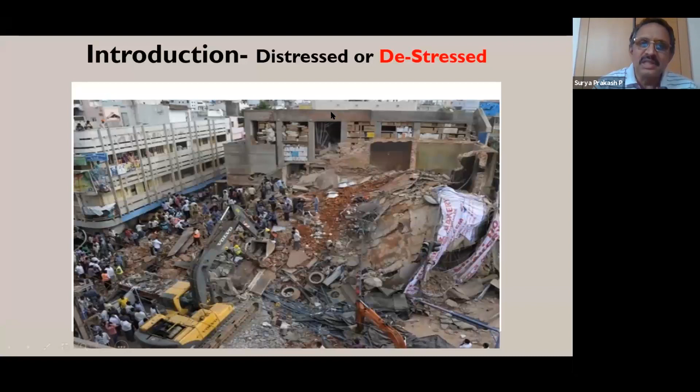But in spite of all this, there are a lot of gaps, like slip between cup and lip. The same thing happens in the design process and construction process also. So the primary cause for distress in any building is a mismatch between the design and construction intent and the actual condition. We think something while designing, but the actual condition will be different. So that mismatch is basically what causes distress in buildings.

So what are all the parameters where there can be this mismatch? Loading, first and foremost. We design for a residential building, people will use it for storage. Like that, there are so many mismatches. And soil conditions: this is the biggest mismatch that can happen if there is no proper investigation or no proper methodology for the soil, which I'll be sharing as we move forward in the lecture.

Accidents. This is another biggest cause. Accident means unforeseen condition, like fire, like blast, like floods. They're all accidents that can happen, which we don't foresee or which we don't factor in our design, except for certain criteria of providing cover and that kind of stuff.

And the materials, again, mismatch in the materials. So the grade of concrete that we assume and the grade that is actually achieved in the construction. Construction methodologies and the structural system. That is the system that we have considered in the analysis and the system that evolved in the construction. Corrosion, which is the biggest thing actually, which can eat into the area of reinforcement that we design and the performance of the structure with reduced effective areas of the reinforcement.

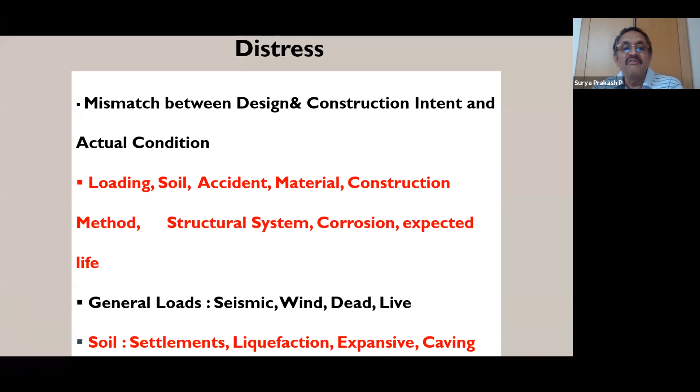Liquefaction, which is another biggest phenomenon during the earthquake for particularly silty sandy soils. When we design structures, we have to consider this phenomenon and provide for ground improvement. Expansive clays and caving in of the soils because of the formation of the strata and different strata. So these are all the various factors that can cause distress in the building.

Accident, we have fire, blast, impact, and flood. These are the various accidents that can happen. So we have to keep in mind, particularly for this accident, we may not be able to design for serviceability criteria, but at least we have to design for the robustness. That means to prevent the collapse of the structure.

Next is the material, poor quality of the material due to improper quality standards, wrong specification, and the shelf life, that is usage of the material. I have come across in many projects where the concrete which is used in the structural elements has already set, initial setting is done. And so when we do the testing, we realize your cube strength will be all right, but actually used concrete in the structural elements will not be according to the design specifications. So that is where shelf life comes into picture, particularly for cement and concrete and various chemicals that we might be using in construction.

Next is the structural system. So it is an engineering error actually in analysis, modeling, support modeling, and element modeling. Also, I come across a lot of people misinterpreting the structural systems, and the load transfer mechanism also depends largely on the structural system. And the corrosion and life of structure, which we'll be dealing with examples, and the quality plan, quality assurance, quality control, quality audit, which is very essential. All these 4 stages for the materials, works, workmanship, and tolerances.

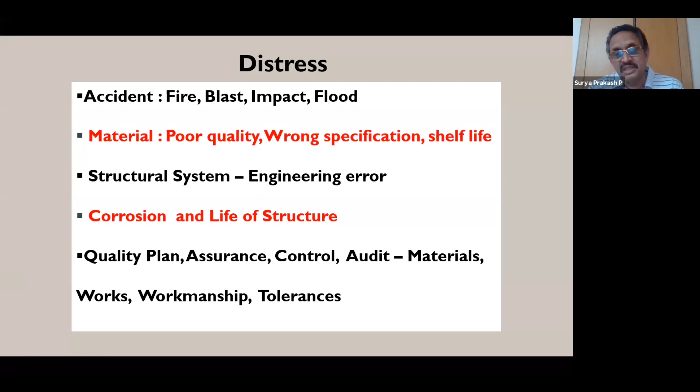These are very important. Most of the people I come across, they say, as a layman, the tolerance is okay, but we have to refer to the codes because they're all interconnected. The partial safety factors that we consider and the tolerance that is defined in the construction, whether it is the verticality of the column or eccentricity in the beam column junctions. So these are all some of the examples.

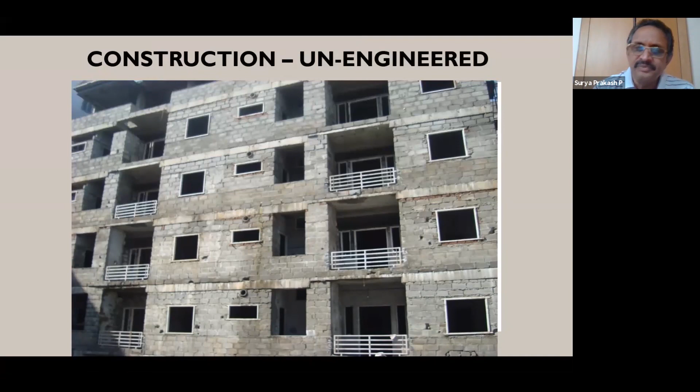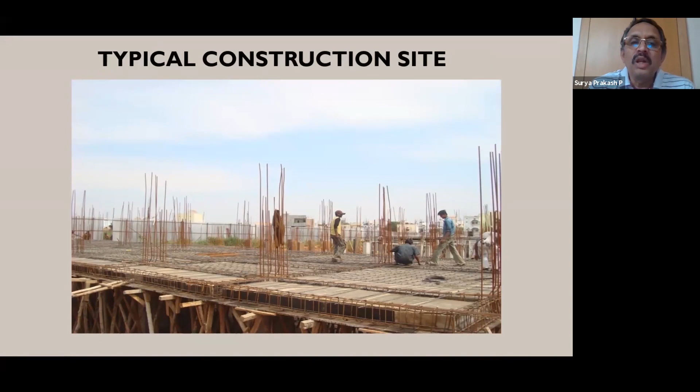And at a typical construction site, as we see, the detailing as per the drawing and the actual construction, whether it is the reinforcement, whether it is the cover, whether it is the alignment of the column, whether it is the alignment of the beams, all these factors will also contribute to the distress if they are not properly done following the relevant codal provisions or standards or practice.

So we have made it a point, particularly for the concrete, to have core tests done at random, so as to ensure that the concrete that is designed and the concrete that is executed are of the same grade. So this is one of the biggest points.

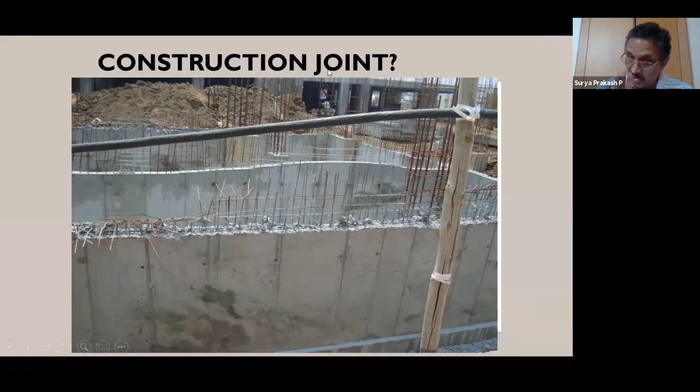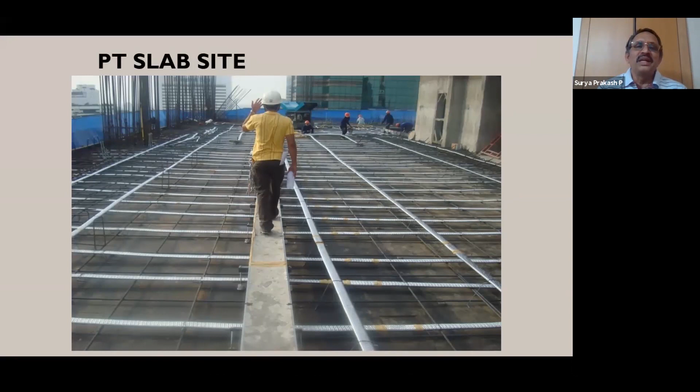Next biggest thing happening in our country now is the PT slab. I've been using these PT post-tension slabs for the last 20 years in buildings. But in post-tensioning, again, with more technology, we are inviting more challenges actually. We are causing more distress in the building. So I'll be sharing some examples of the challenges that we have in PT, post-tension slabs also.

Next is the waterproofing. This is the biggest thing that happens in buildings, particularly residential, or even office for that matter, where we have the toilets, and if they are not treated properly for water barriers, and the detailing of this water barrier in conjunction with the sewer lines and the plumbing lines is also a big challenge actually. So this can also cause, over a period, deterioration of the designed concrete quality and the performance of the structure, leading to higher distress. It starts with dampness, then slowly corrosion and then distress in the structure. So this waterproofing, water barrier, is also a very important element which I'll be sharing.

The construction people take a decision to change the level considering the soil, but it has to be brought to the notice of the concerned design engineer and probably a geotechnical expert to take a decision on how it has to be treated when you have different founding levels.

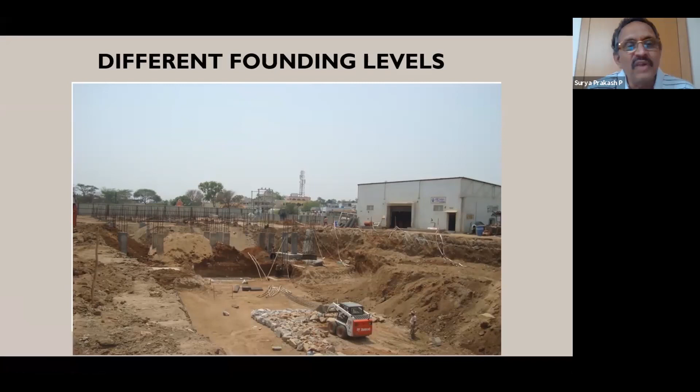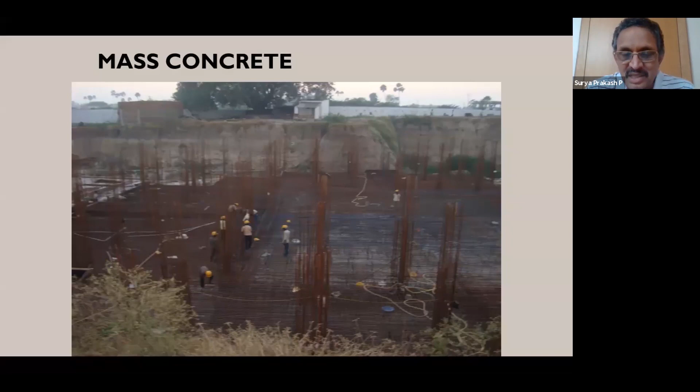Next is the mass concrete. This also causes a lot of issues, in rafts particularly, when you do the mass concreting without designing for the heat of hydration. The initial concrete itself can have cracks internally, which can also lead to additional stresses and distress in the foundation itself.

We have to plan before itself, considering the excavations, adjoining structures, and we have to draft the design basis considering the type of soil and the depth of excavation and adjoining structures. So this is the important aspect. So I'm just covering various aspects of this distress.

Collapse during construction, which is again quite common, which happens in most of the buildings because of lack of construction engineering. So one has to plan the shuttering and centering and support system for any concreting works, considering the loads during construction and the stages of construction. We have come across many through news, many during construction, and loss of life is a very pathetic thing that happens.

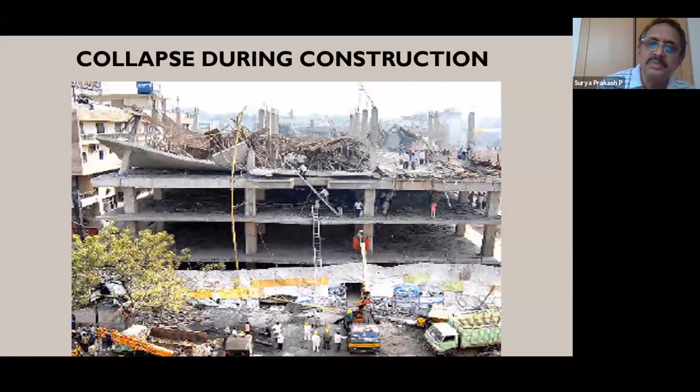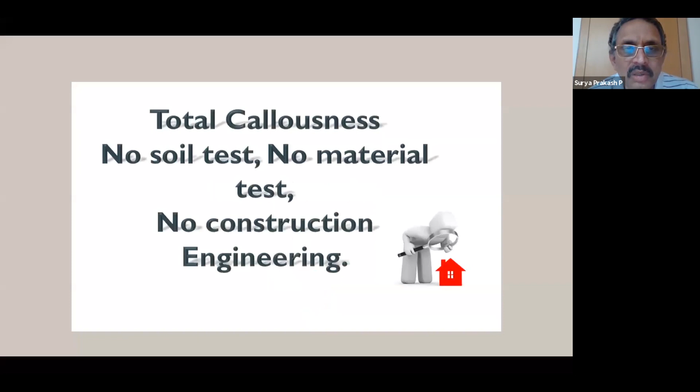So now let us look at some of the case studies that I have come across, just to stress on the importance of proper engineering, proper quality control, and proper management of the built environment. So no soil test, no material test, no construction engineering.

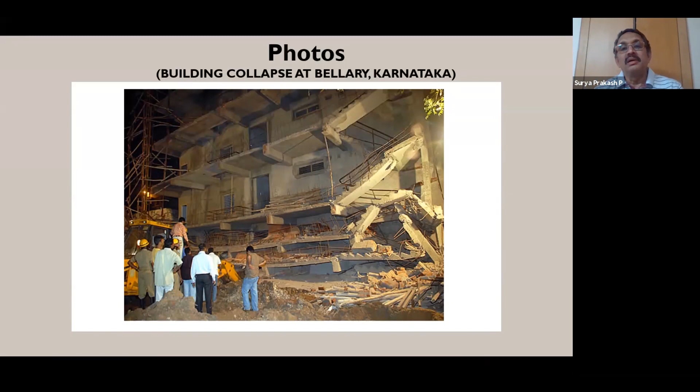And this is another accident in Karnataka, Bellary, I think. Yeah, Bellary. And here also you can see during construction itself, due to bad material, bad engineering, or no engineering, the building has collapsed, and a thorough investigation was done, and the people responsible were taken to task.

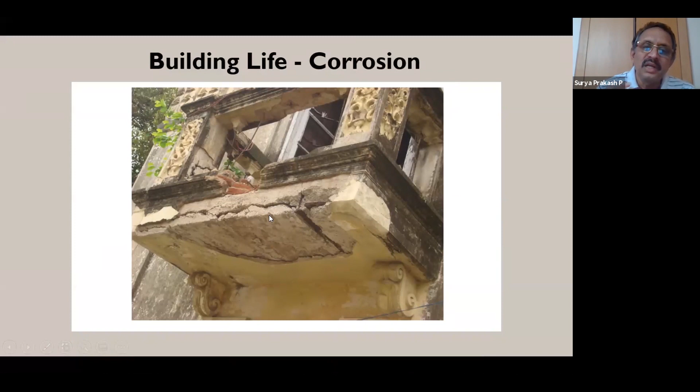Next is the dilapidated heritage old buildings. This is probably a more than 100 years old building in Hyderabad. This is the condition of the building, and if this has to be saved, it is a very real challenge for the engineers restoring this kind of building, where this was lime concrete, and lime concrete has to be restored. And you can see a lot of vegetation and erosion in the soil underneath the structure itself, and the ground levels varying. So all this has to be considered while assessing the life of the structure or certifying the further life of the structure, the residual life of the structure.

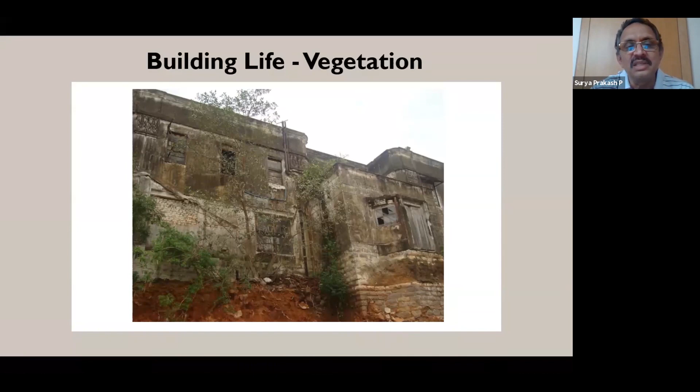So here also you can see below the foundation, the soil has got extensive roots and trees grown, and it will also cause distress in the building. This is the weathering aspect of even the jack arch roofs. It has served a very good life already, more than 100 years, but still, if we have to extend the life of this kind of structure, thorough investigation and a proper method of restoration have to be adopted.

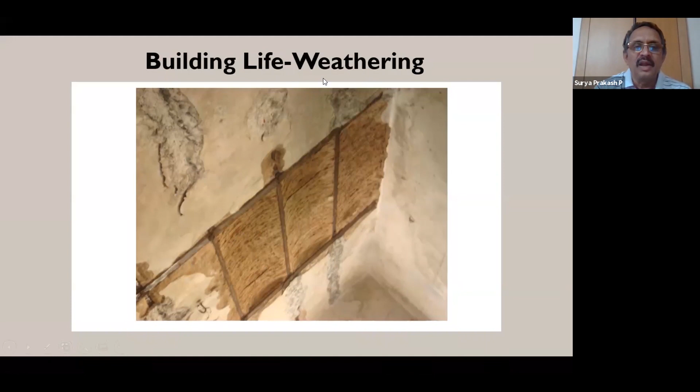Next is the earthquake. As introduced, I had the opportunity to visit Gujarat, Ahmedabad post-earthquake. Very unfortunate, but a big eye-opener. In fact, this is when I felt a strong need for engineering reforms. I was part of a committee constituted by the government of Gujarat then, and I had the opportunity to work with Professor A.S. Arya.

And so in our report, we prepared the guidelines for damage assessment of structures post-earthquake, and which kind of structure can be restored and which kind of structure has to be dismantled. We prepared the guidelines, which have become part of the code, I was told later. But we have also given the recommendation to the government to value the presence of good engineering practices.

This is very, very important, because most of the structures in Gujarat were not designed for earthquake itself. That is the saddest part of it. So they will be subjected to distress because of the earthquake for which they were not designed. And then periodic training of all categories of engineers. What are the categories of engineers?

We suggested that a geotechnical engineer has to be on board of every project, along with a structural engineer and a civil supervising engineer. These three categories are minimum for any project, but for larger projects, larger spans, or tall buildings, there should also be a peer reviewing engineer. So there are 4 categories that we have suggested, along with minimum fee structures for professional engineers.

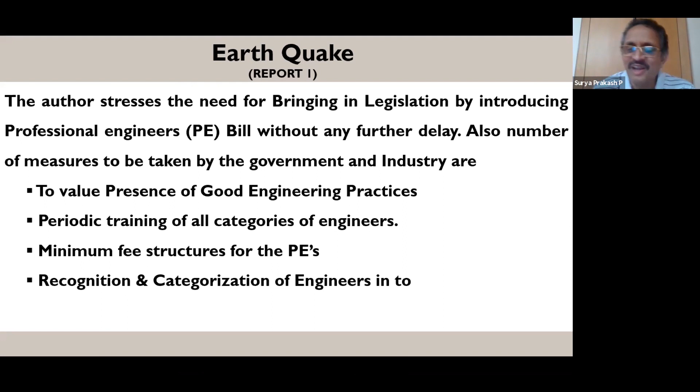So: geotechnical engineers, structural engineers, construction or supervising engineers, and proof consultants or peer review consultants. These are the 4 categories which have to be part of the design team or project team, who should be professional engineers. They should have accountability, responsibility, and should also be recognized by the government in these categories. This is what we are all fighting for all over India now.

So the first cause of damage is lack of good engineering practices, resulting in poor quality of materials, bad workmanship, and lack of good construction practices.

The second cause is ill-formed structural systems, such as irregular grids, stub columns or floating columns, large cantilevers, and unsymmetrical, non-uniform patterns. Now you can see the latest codes, IS 16700 and IS 1893, have recommendations about symmetry that have evolved from these observations made during the post-Gujarat earthquake.

Next is the lack of proper design approach. Many buildings are not even designed for earthquake, as I said. The ductility provisions to be followed in earthquake-prone areas are not followed, and even the standards for detailing or provision of reinforcement are not complied with. So everything is missing.

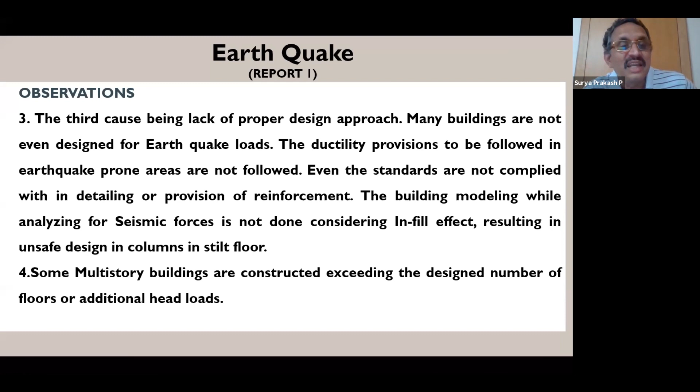Multi-story buildings are constructed exceeding the design number of floors, or with additional head loads like water tanks. Buildings with good framing patterns and columns at regular intervals — every engineered building — have performed well. 90% of engineered buildings survived the earthquake without much damage. So the basic requirement is engineering.

Buildings that are near square shaped in plan, without a stilt floor or open parking, have performed very well. These are all observations.

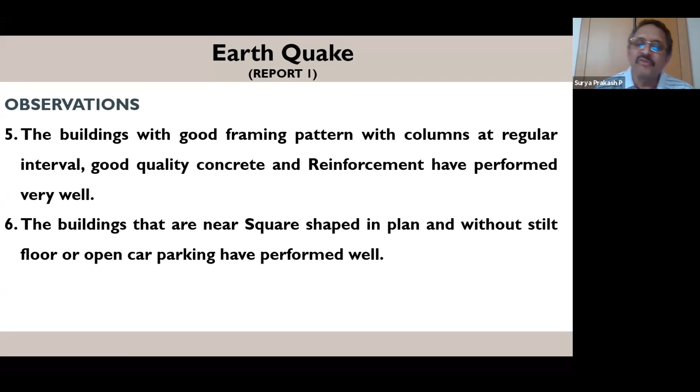So we shall enforce the Professional Engineers Bill. This was our recommendation in 2001: 4 categories of engineers, and occupancy certificates with periodic renewal. Please remember, all buildings have to be qualified for seismic loads every 5 years. This is another recommendation we made, and it is part of the National Building Code also.

So we all have to insist that when we certify any structural stability for a building, we qualify it saying this certificate is valid for 5 years and has to be renewed every 5 years. This is because codes are changing, and with every revision, the building we have certified has to be retrofitted. So we all have to work for it.

Next, all buildings must be designed and detailed per IS 13920 in earthquake-prone areas, necessarily analyzing with 3D modeling and dynamic or quasi-static methods. Complex shapes in plan should be avoided as much as possible, along with irregularities in stiffness and mass. These are all the recommendations.

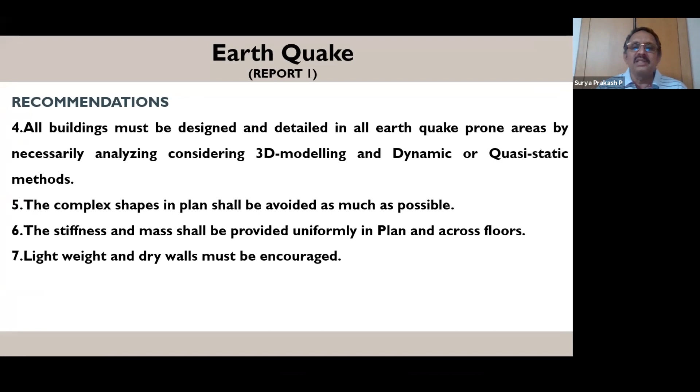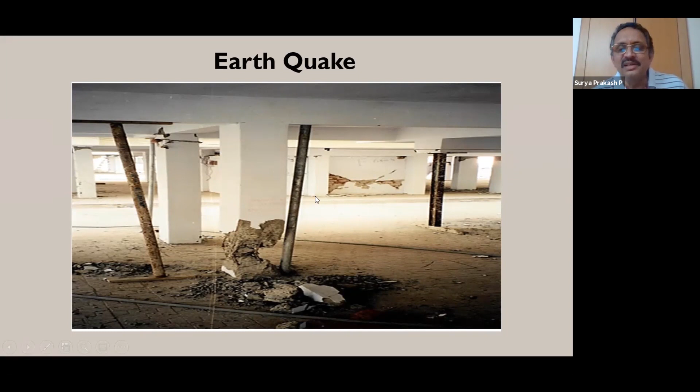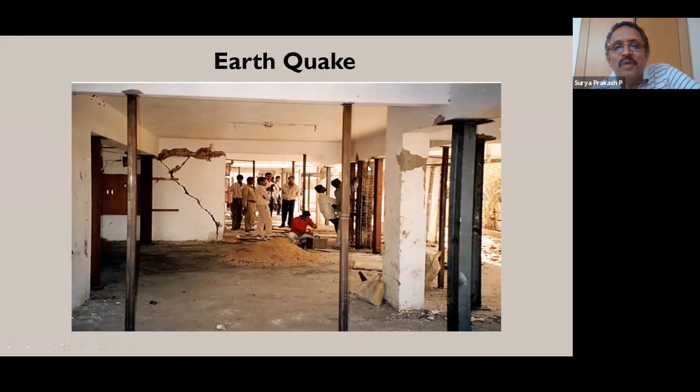And here you can see people started retrofitting or repairing — cosmetic treatment, I call it — without proper design again. We are repeating the same mistake a second time.

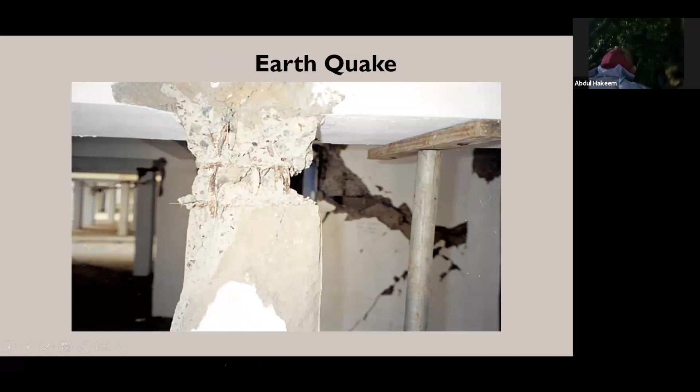So this is the distressed buildings I call. You can see here also, most of the damages are near the beams, floor beams, and above the floor actually. So the maximum shear occurs here. That's why we have ductile detailing at the junction of the beam and columns actually. So here also, this is another case of column where it has cracked. So these are all the distressed elements.

Next is the wind. So earthquake, we have seen some examples, and wind, these are some of the towers which I have inspected post-collapse. Maybe I would have done 50, 60 collapses, forensic audits for the failures.

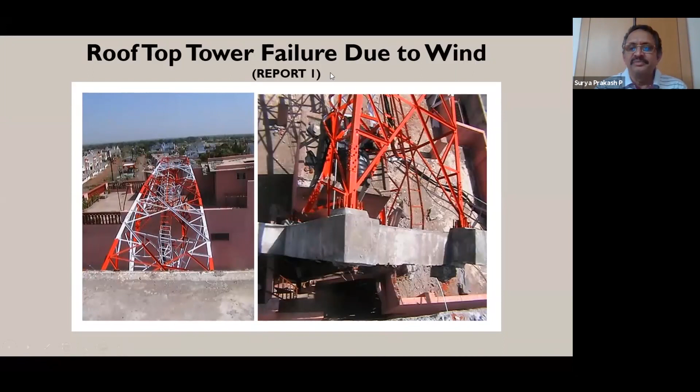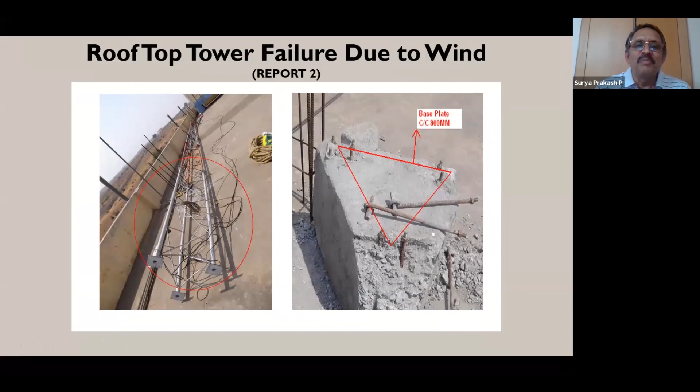Here you can see the foundation concrete also has flown with the tower. So this kind of distress is because of the lack of proper anchorage. So when we talk about the wind, the shear and the anchorage are very important, and the tension for which we have to design. So these are the foundation pedestals you can see without proper anchorage to the base structure. And this is another mast actually, which has collapsed.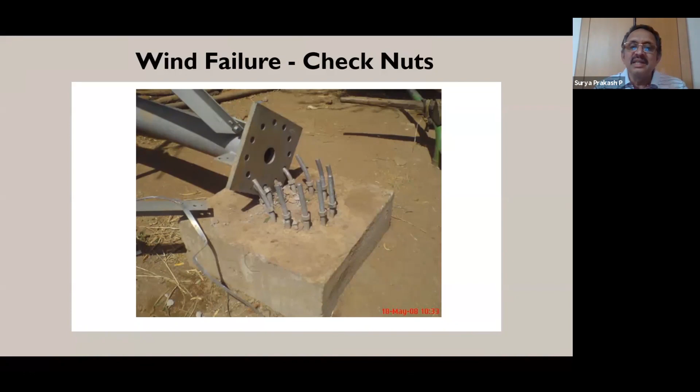And base plate, the check nut. In fact, we insist on nut and check nut. Check nut is the second one, which should prevent, and these are the leveling nuts below the plate. So this is very important because if we see these distressed structures, we'll understand the importance of this detailing and various provisions in the codes that are given.

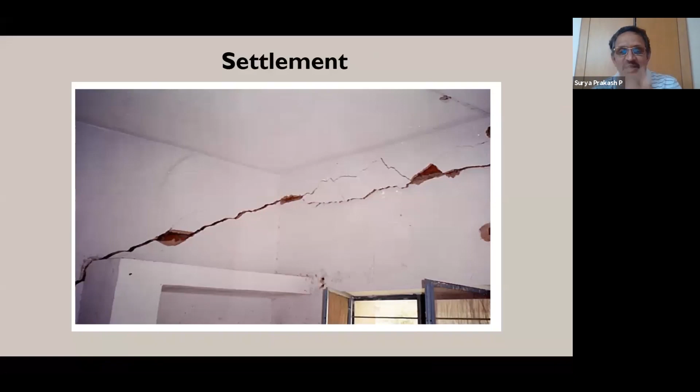Next is the settlement. So this is the settlement, and due to the expansive clays actually in one of the projects that we have observed, even 3 inches kind of separation in the masonry walls. So you can see here, this is due to the soil settlement. So distress in the structure due to the soil settlement. And we marked these things to observe the further progress of the cracks during the settlements, and we had to give external solution for this kind of projects. You can see the building. It's just G+1 building, but still there are so many cracks and distress in the buildings here also.

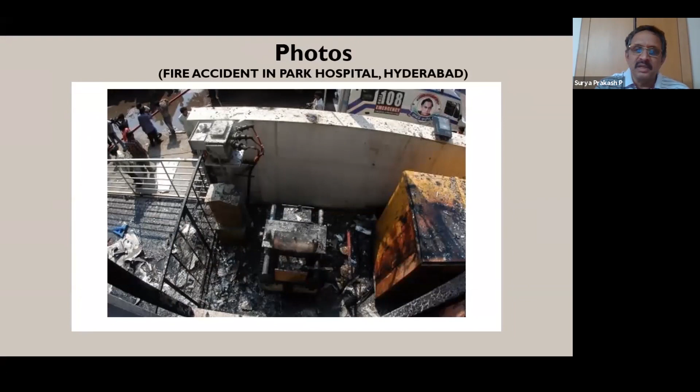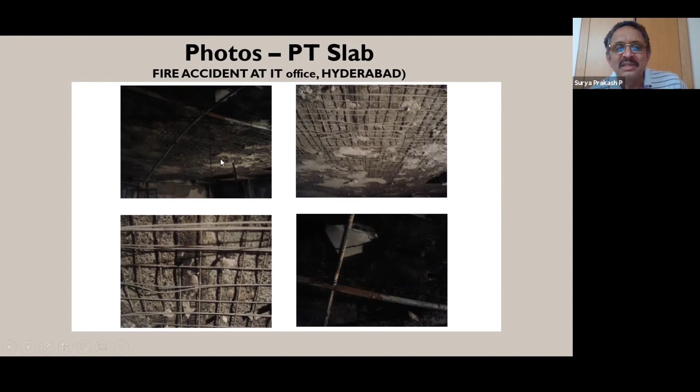Next is the fire. Fire is a very common thing that happens in most of the projects, particularly with electrical installations and all. Here you can see, this is an IT building with post-tension slabs. In fact, till I analyzed this fire accident, I used to think PT, post-tensioning, is bad against fire. But after observing this, in fact, PT saved the structure, because the PT strands have more cover, and during the fire, though the whole reinforcement got exposed, the slab was intact. So the post-tensioning has saved this, and we have restored this slab.

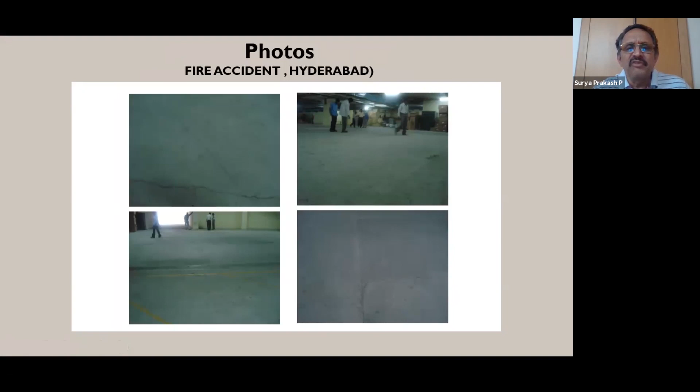Even the drop panels, you can see the reinforcement is exposed in the flat slab drop panels. So we observed the levels of the slab and cracks in the slab, and we recorded, and we found that the structure is safe and intact, and we immediately repropped and restored this structure. And it's almost more than 10 years. It's performing well even now after the rehabilitation.

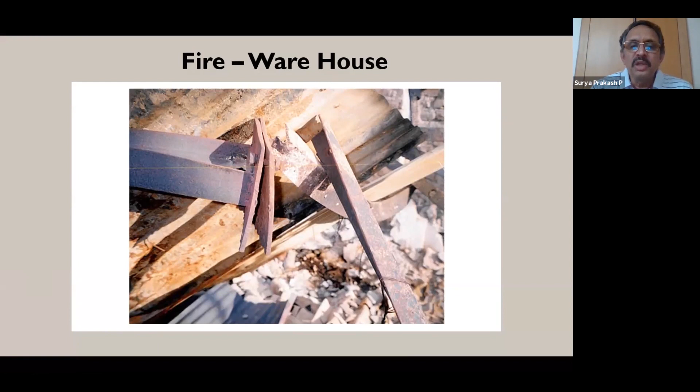Steel structures in fire. Again, this is the biggest thing we all have to consider. Here, the structure has collapsed because steel structures, if we don't treat for fire rating, whether it is insulation or intumescent paint that will create the insulation when it is subjected to fire, it's very important for steel structures. Otherwise, steel structures are very disastrous against fire, and corrosion, of course. So we have to, as engineers, take precaution to advise and draft in the design basis the fire rating. 2-hour fire rating minimum is very important for any structure, because that is the time required for evacuation during fire accidents.

So these are some of the photographs, and you can see how the steel members are twisted.

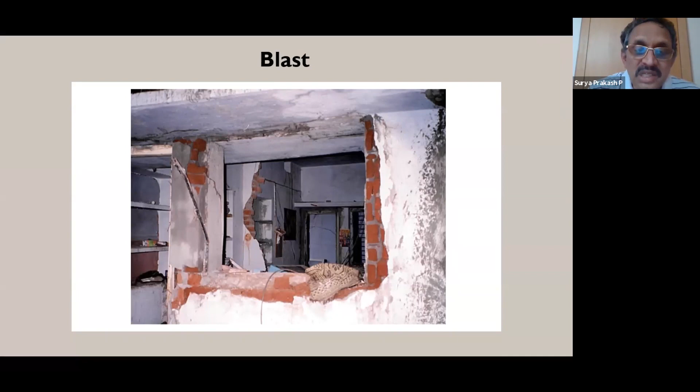Next is the blast. Even a small house with a gas cylinder blast, you can see the kind of distress that it can cause, and loss of life. So we have to have basic detailing provisions to prevent structural collapse due to blast. People may not die because of the blast, but people will die because of the collapse subsequent to the blast. So we have to give the robustness to the structure against blast, particularly in tall buildings and all. So this was one of the blast accidents that happened.

Next is the structural system case study. So we come across many times the flat slabs, flat plate difference and flat slab, and drop panels being missed, or column heads being missed, and the shear failure it may cause, or the distress or excessive deflection that it can cause in the flat plates.

So we have to retrofit such things, or we have to properly design the elements with the proper structural system.

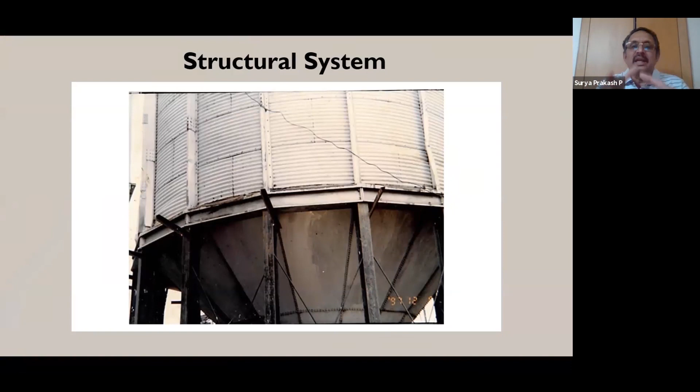This is another interesting example I have come across, the silo. In any design of the silo, we all know that the most important thing for considering the load or stress in the silo shell is the friction coefficient. Here the designer very excellently considered the GI sheet, but he put the GI sheet horizontally, corrugation, because of which the friction coefficient multiplied manifold, and the whole silo failed because of the excessive loading. This is because of the mismatch between the structural system design and the structural system actually executed. Such examples show us the importance of these minute things, which we have to meticulously follow, starting from design intent, design basis, design calculations, and construction engineering and construction practices.

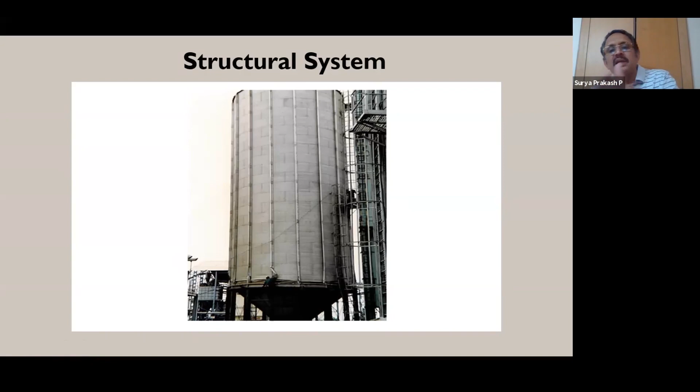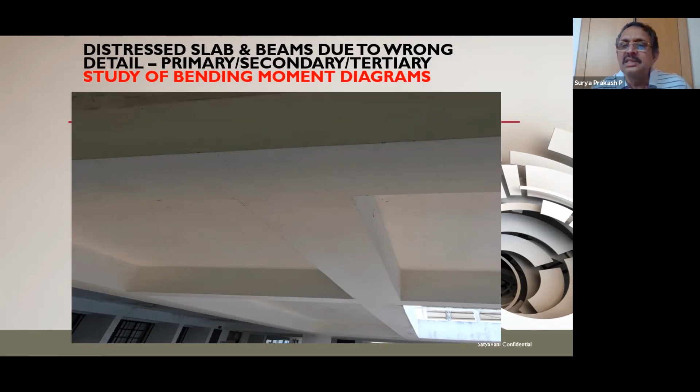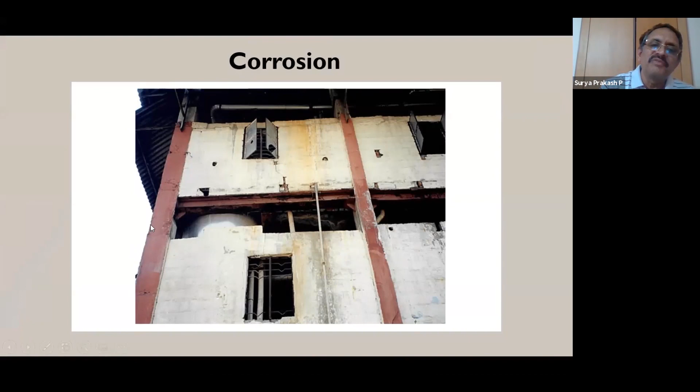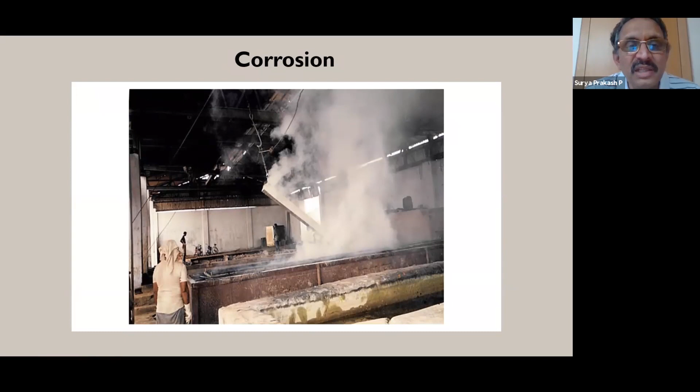Next, corrosion, very important. I have come across a good example of a factory with a steel structure that was not painted properly — you can see they just painted red oxide and left it. See the exposure condition and the extent of corrosion in the steel structure and concrete. The structure was about to fail, so we inspected it. We have to give proper specification for protection against fire and corrosion for steel structures as well as concrete. I have given you examples of both concrete and steel — fire and corrosion in concrete, and fire and corrosion in steel. This is the kind of fumes present in the factory, for which the design intent did not specify the proper treatment for the structural steel members.

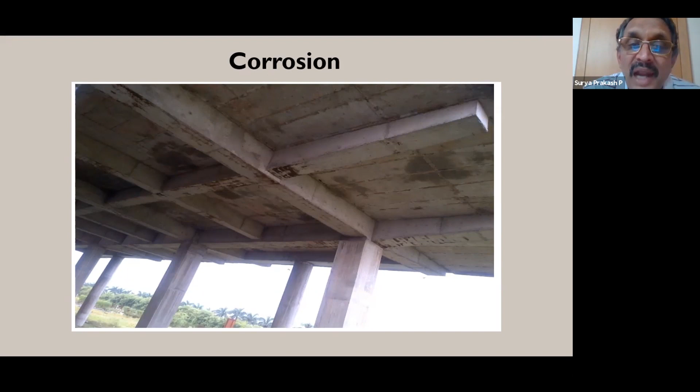And this is the concrete structure. We all talk about exposure condition in IS 456 — mild, moderate, severe, extreme kinds of exposure conditions for concrete. Here is a classic example of inadequate cover for the reinforcement, because of which you can now see the entire reinforcement pattern in the structure — columns, beams, and even slabs. This is the corrosion example of concrete structures. You can imagine the level of distress this corrosion can cause to the structure. This is the column — you can see the ties and main bars in the column with the corrosion.

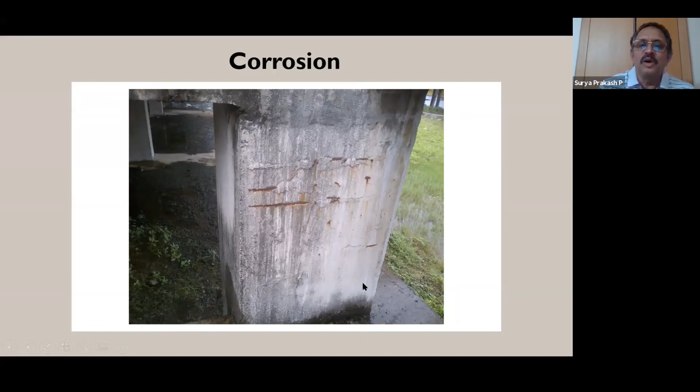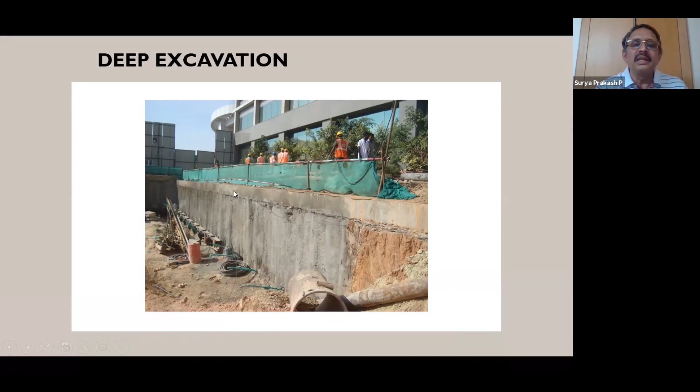Next is deep excavation, very, very important. Nowadays we are doing deep basements, in fact 20 to 25 meters deep, in many projects over the last 15-20 years. We have to study the soil profile, soil strata, water table conditions, and hydrostatic pressure. All these things we have to consider in design, and if we don't design properly, this can cause a lot of distress. Here you can see the shoring piles with a capping beam, and before excavation even proceeds, we keep doing guniting or shotcreting with a mesh of reinforcement and the piles.

Regarding the design brief, I would like to say that I pay a lot of attention to micro detailing, and we have to insist on a certain design brief — that means specifying the method of deep excavation shoring protection. There are so many methods of shoring protection, and as engineers we have to specify the right one, which is reliable and safe. If we specify it right, and some contractor takes a deviation, and something happens, at least as a structural engineer you are protected.

But it is very, very challenging, I would say. We have come across this kind of collapses in the deep excavation. Next is the plinth beam, grade beam, and brickwork above plinth beam, brickwork below plinth beam. All these things we have to detail very carefully, considering the water table levels and flooding conditions. And also the reptile or rat protection. All this is very important in the detailing.

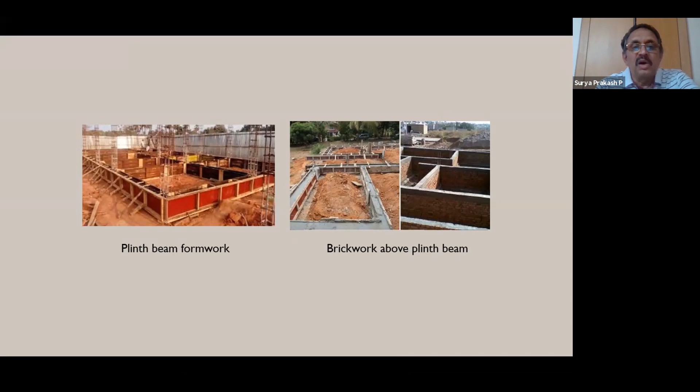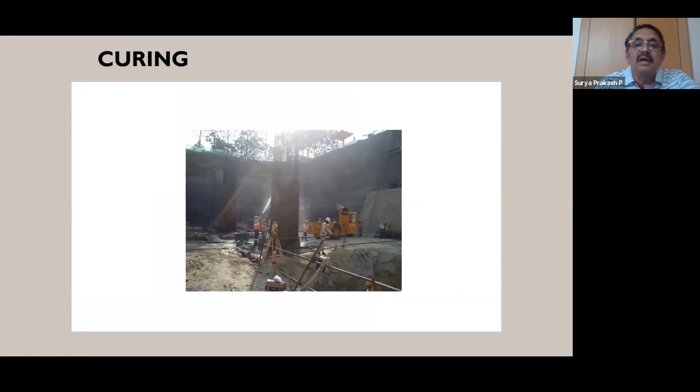So these also, bandicoots, which can excavate through concrete or brickwork even, and cause a lot of collapses in the structure or soil settlements. Curing, next, during construction is very important. Curing precautions with the proper curing methodology, whether it is curing compound or water curing, and steam curing in case of cold weathers, or in precast conditions, accelerated curing. All this we have to specify properly and follow the methodology as per the design.

Next is even the plaster and masonry works. We have seen many failures because of lack of design. Many people think that masonry is mason's job. No, actually masonry is also engineer's job. We have to do proper design for masonry. There are codes for masonry. There are codes for design of structural masonry.

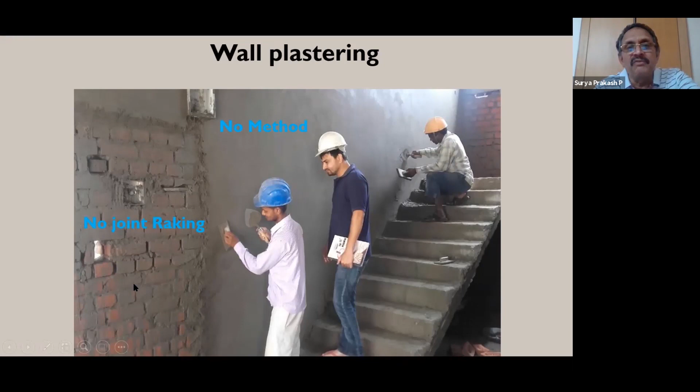Every structure, every element that weighs more than 500 kgs, let us say, is a structure actually. We have to design for the wind load, self-weight, and any eventual loadings. And we have to detail proper construction method and the proper execution method. Method statements we have to prepare for masonry and plaster even. And next is the waterproofing.

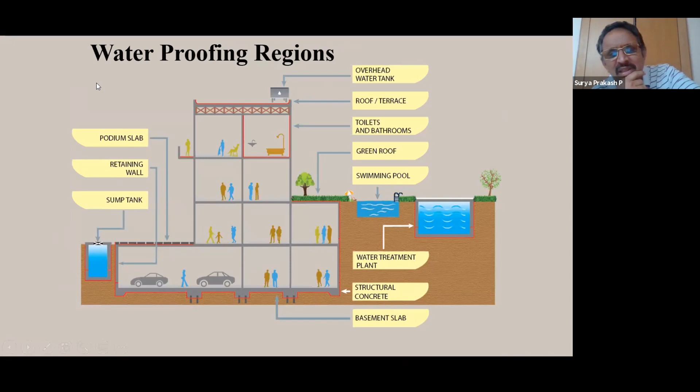Waterproofing itself is not a correct terminology in my opinion, but still the structure that we are designing, we are giving the cover assuming normal exposure condition or moderate exposure condition. But if we don't provide these water barriers for the structure, there is a mismatch between the design intent and the design basis actually.

So we have to have waterproofing barrier below the foundation and around every exposure of water and dampness, like underground sumps, swimming pools, septic tanks or these collection tanks. So roof is another thing, weatherproofing of the roof. And driveways, and lawns landscaping. So you can see we have to detail the waterproofing barrier, which otherwise can cause distress in the buildings.

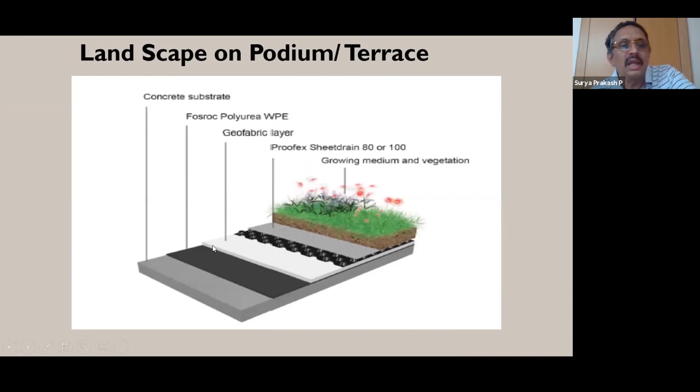And this is the detailing for landscape. We have to provide the drainage, geofabric layers, sheet drains and membranes and all that. So we have to be very cautious. And this is the weatherproofing and waterproofing in the roof terrace. 2 layers of waterproofing. You can see the level of detailing that we do. So these are all very important aspects.

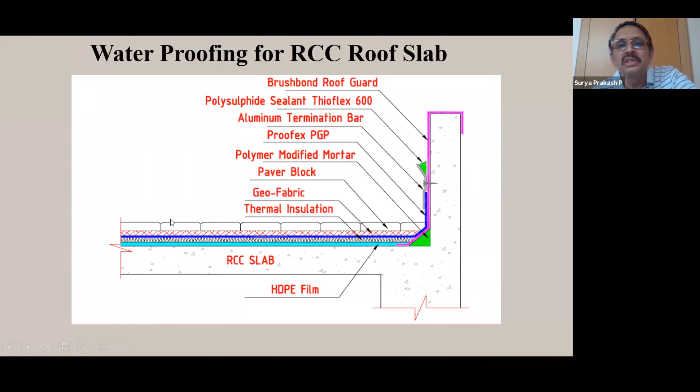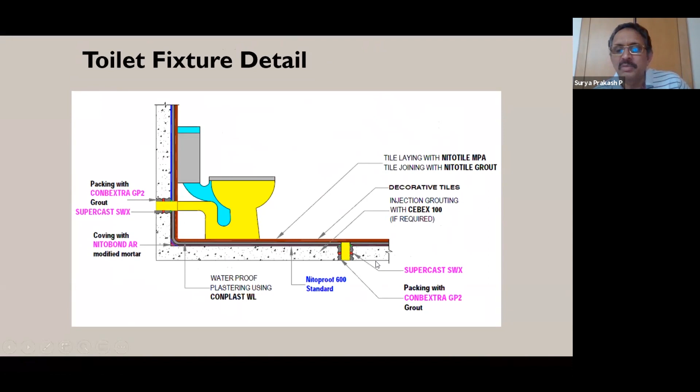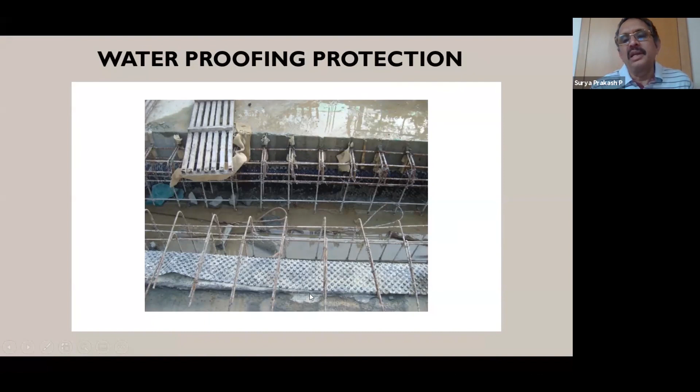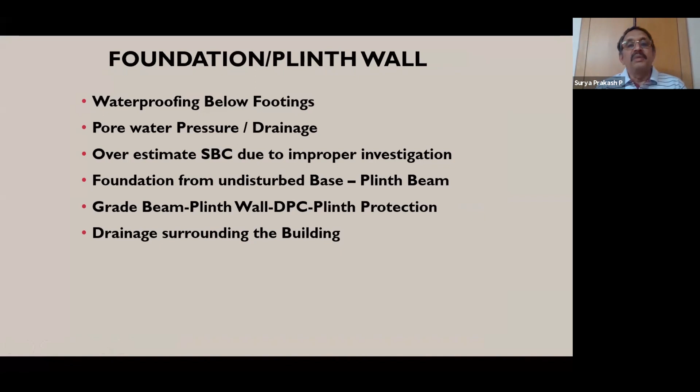So waterproofing below footings, pore water pressure drainage, overestimated SBC due to improper investigation, foundation from undisturbed base, and plinth beam, grade beam, plinth wall, DPC, plinth protection, drainage surrounding the building. So this brickwork has become non-engineered mason work. So we have to follow these codes, IS 2212:1991 and IS 1905 for stability of the masonry.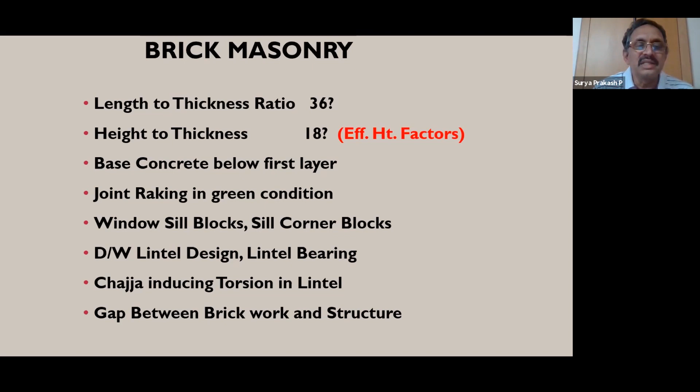So let's not forget, we have to design the masonry. Length to thickness ratio, height to thickness ratio for the masonry, they're all specified in the code. Nowadays we are using so many types of bricks and blocks, aerated concrete, cellular lightweight concrete, clay bricks, cement blocks and lightweight bricks and all that. So for each of them, these factors will change. So we have to be very cautious and design the masonry as per the codal provisions.

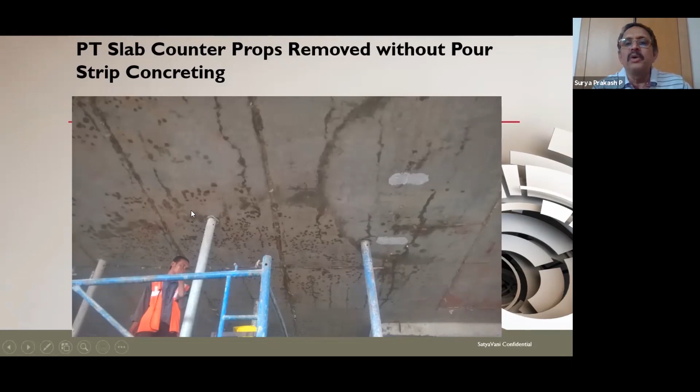And PT slab counter propping without pour strip concreting. So this is a very important thing, counter props being removed during construction has caused a big cracking here. You can see this is the pour strip and this is the cracking that happened near the supports. So we have to jack up that slab and we have to restore the structure.

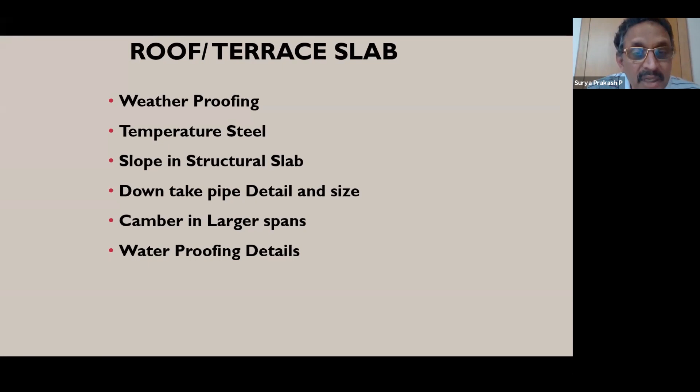So these are all the things we have to take. And in flat slabs, direct design method and equivalent frame method, you have the limitation. Many times they'll be missed. So we have to be very careful, and punching shear provisions, deflection check in large span, long-term deflection particularly, considering the shrinkage and creep and cracked section and inelastic section. So these are all the things, particularly when we do limit state of serviceability checks.

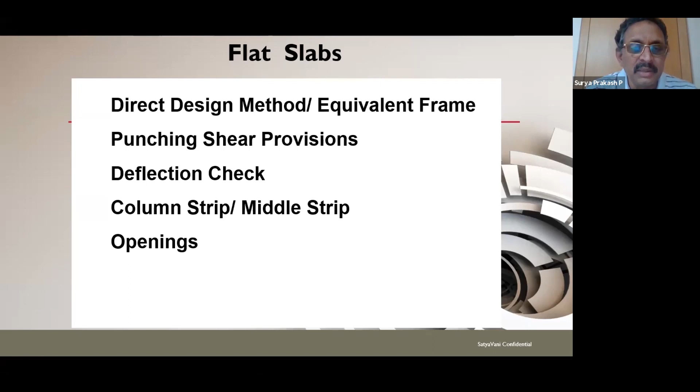And column strip, middle strip, and openings in the flat slab. Lap provisions, honeycombs in the concrete, lumping due to initial setting happening before usage of the concrete, and ties in the columns and starters in the columns. The starters are the biggest cause of distress, and beam junctions. So these are the various distresses in the beams and slab due to bad detailing. So this I have shown.

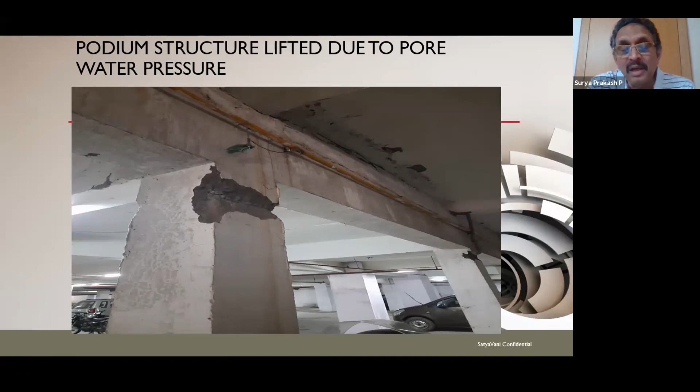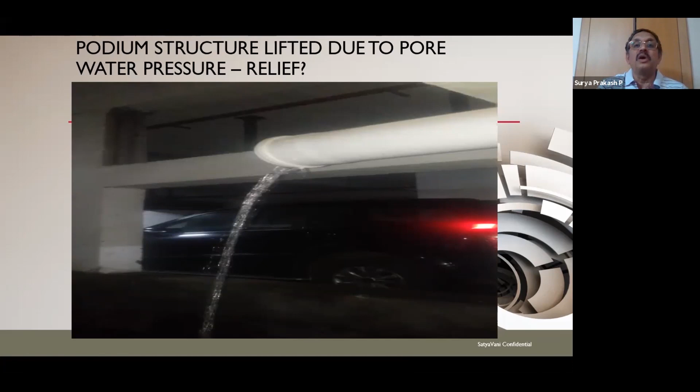And this is in one of the basements, we had hydrostatic pressure, and the whole basement, 2 floors, got lifted in the podium level actually, just because the client had plugged the pressure relief wells. Then we had to provide separate bores and give the pressure relief like this. This is after retrofitting is done. So water pressure is relieved and the structure performed well. So distress can be caused by hydrostatic pressure and very honeycombed and bad concrete. I mean, we should not even look at these kinds of pictures, but that's the reality of what is happening.

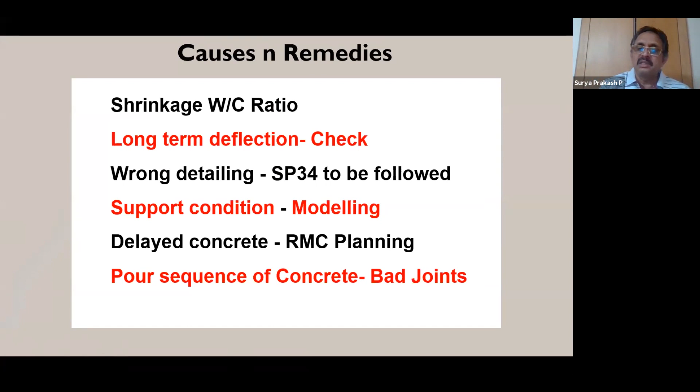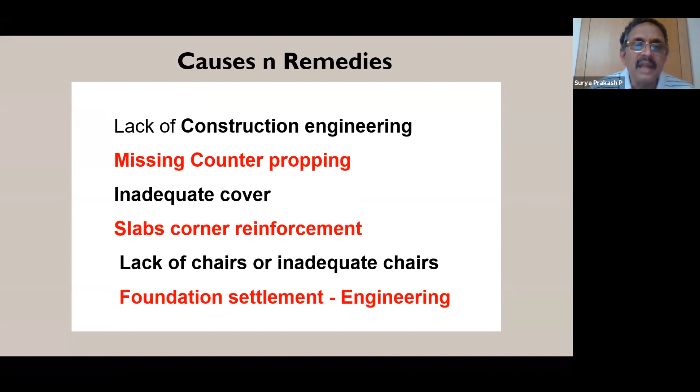Shrinkage due to water cement ratio, long-term deflection checks not being done, wrong detailing, SP34 to be followed, support condition modeling, delayed concrete, particularly when we use ready-mix concrete, pour sequence of concrete, and bad joints. These are all the causes, and we have to eliminate them. Lack of construction engineering, missing counter propping, inadequate cover, slab corner reinforcement, lack of chairs or inadequate chairs, foundation settlement,

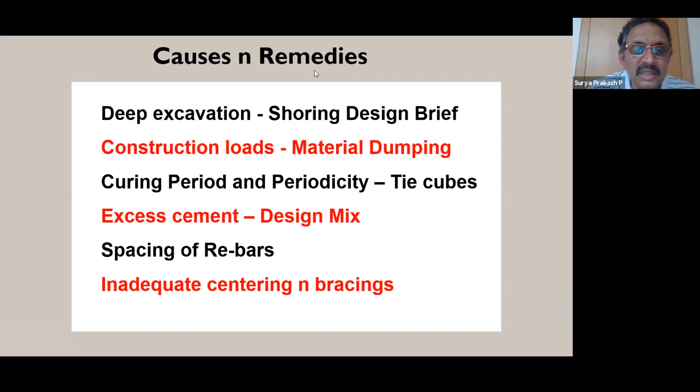foundation engineering. Expansive soils, backfill compaction, layered soil properties to be considered, inadequate or no geotechnical investigation, expansion joint treatment, reinforcement congestion in detailing, construction sequence time, satisfying design assumptions, buttress retaining wall versus backfill condition of the stem wall. Deep excavation shoring design brief. I'm just wrapping up. And construction loads, material dumping during construction, curing period and periodicity of cubes, excess cement in the design mix, spacing of the rebars, inadequate centering and bracing.

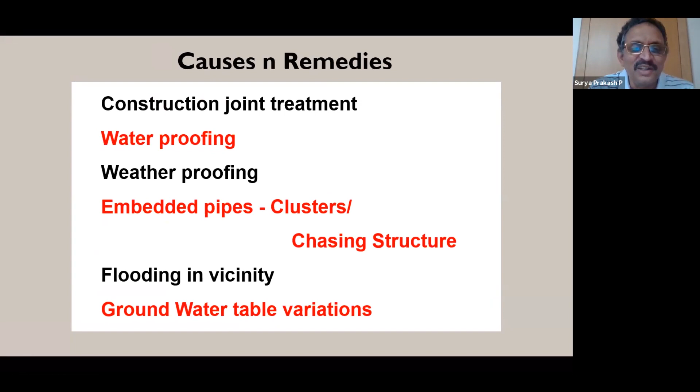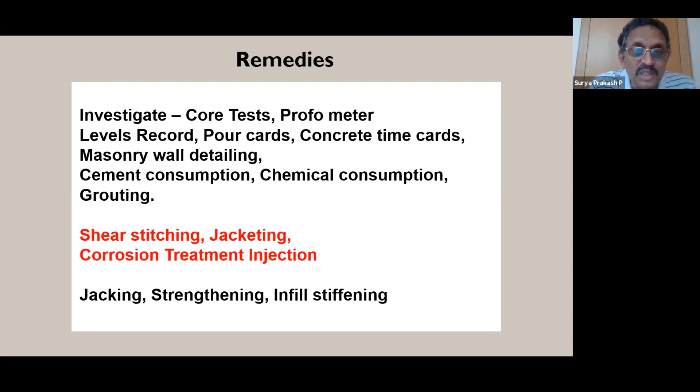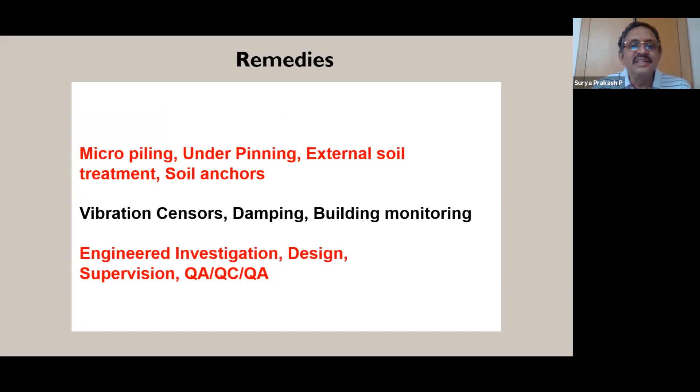So remedies are investigate, core test, profometer, levels record, pour card, concrete time cards, masonry wall detailing, cement consumption, chemical consumption, grouting, shear stitching, jacketing, corrosion treatment, injection, jacking, strengthening, infill stiffening. These are all the remedies. Micropiling, underpinning, external soil treatment and soil anchors, vibration sensors, damping, building monitoring, and engineered investigation, design, supervision, quality assurance, quality control, and quality audit.

And finally, prevention is better than cure. So to avoid distress in buildings, we have to train engineers, motivate engineers to be engineers, and enlighten stakeholders to engage engineers. Nurtured engineering gets better engineers. This is my slogan, actually. Buildings get distressed without building engineers. And no causes or remedies are needed for the project with good engineers. So let us all educate people to engage with engineers for better engineered buildings.